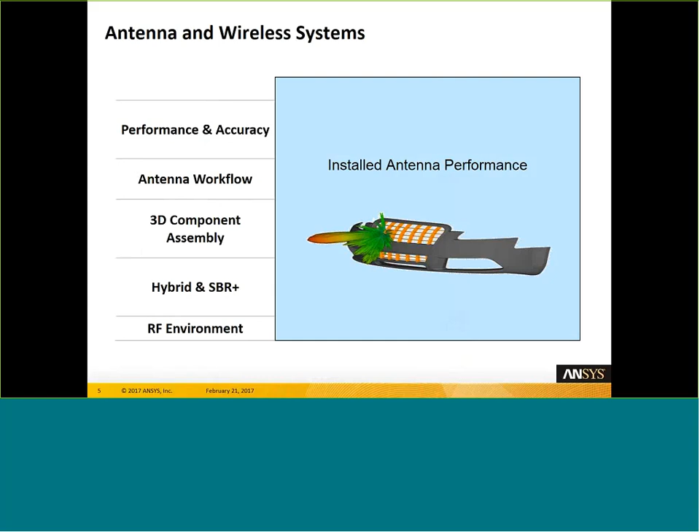Now, we'll start the presentation by talking about some of the enhancements and advancements in our solutions for antenna and wireless systems. And we'll be covering a range of topics regarding performance and accuracy improvements, improvements to design workflows and antennas, some interesting enhancements for 3D component assembly, hybrid and SBR+ solving, where we combine finite elements, integral equations, and shooting and bouncing ray solutions in one environment, as well as enhancements to our RF environment, namely enhancements to our EMIT product.

In detail, we'll be talking about topics like a new technology we call broadband adaptive meshing, some MPI enhancements to our frequency sweeps and overall enhancements to the speed, improvements to the antenna design kit, including the addition of some new antenna models. In detail, we'll talk about the 3D component browser, some topics regarding encrypted components, as well as data protection.

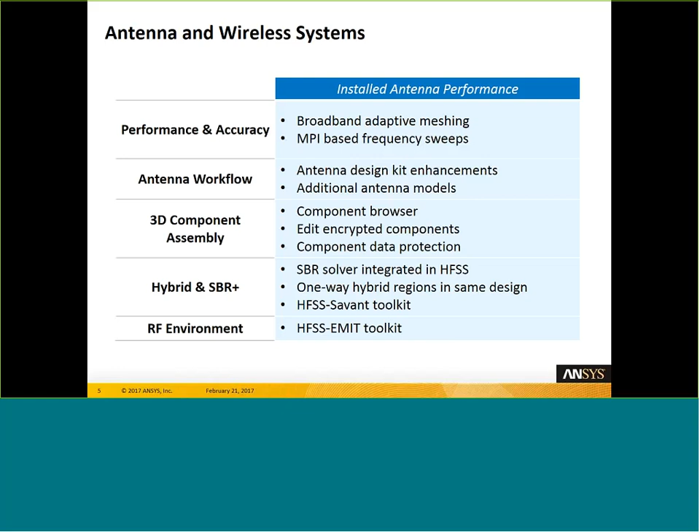The SBR solver is now integrated in the HFSS desktop. This is sort of our first step in integrating the technology from Delcross Technologies that came on board about 1.5 years ago. Some nice enhancements to our hybrid solving techniques, as well as our links between HFSS SBR+ and HFSS and EMIT.

Now, real quickly, we'll do a broad overview of the electromagnetic high-frequency solver portfolio at ANSYS. And it starts with, of course, HFSS and finite elements. So HFSS has been around for decades. It's been a staple solution for electromagnetic engineers for modeling, designing and simulating devices that range anywhere from passive components on ICs up to large antenna arrays.

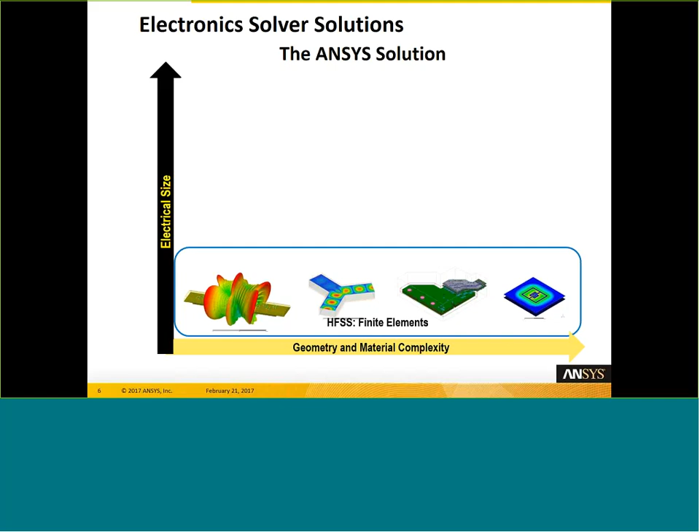Now, finite elements is a great solution when you get up to tens of wavelengths and you have a high degree of geometric complexity. But at some point, it starts to run out of gas as you get to very, very large electrical size. So we also have a 3D method of moments solution that is integrated with HFSS that we call HFSS IE. And one of the interesting technologies that come with that is our FE-BI technology, finite element boundary integral.

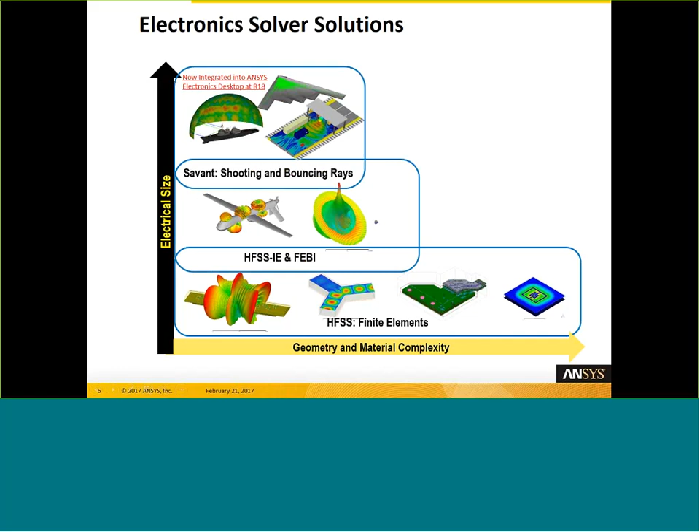And then, of course, new to R18 in the desktop is the beginning of the integration of the Delcross shooting and bouncing ray technology. And all of that technology is going to be pulled together and held together by our domain decomposition backplane solver, which is the heart and soul of DDM as well as our hybrid methods.

Now let's talk about SBR, or shooting and bouncing ray. What is this methodology? Well, it's an asymptotic technique that's complementary to HFSS. So, for example, in a flow where you're using HFSS and SBR, formerly known as the Savant product, you would use HFSS to model the antenna component, and then use the results from that antenna analysis to source an asymptotic technique to allow you to tackle really large antenna platform integration challenges in a very efficient and fast manner.

Now, it's an extension of physical optics techniques where it's extended with multiple bounces through geometric optic ray tracing techniques. It's very powerful. You start with a source point, like an antenna mounted on the top surface of this aircraft. You shoot out these shooting and bouncing rays. They paint new currents at various scattering points on the aircraft, and those additional currents are added to the overall results for the radiation pattern of the antenna.

And in a little more detail, our shooting and bouncing ray plus technology is an extension of the SBR technique where it adds correction factors such as physical theory of diffraction, uniform theory of diffraction, creeping wave technology, as well as curved surface divergence factors. So it's an extension of shooting and bouncing ray for a much more accurate, much more physical solution.

And again, you start with bouncing rays, you paint currents. Those currents can themselves shoot additional rays, which will create additional painted currents. We can take into account corrections for edge current PTD effects, as well as UTD edge diffraction, and take into account creeping waves where you have ground currents creeping around over surfaces that the antenna is mounted upon.

That all ends up with the image in the lower right-hand corner where you have not only the original source antenna contributing to the far field patterns, but also this large number of painted surface currents on the scattering object, allowing you to understand exactly how the antenna is going to perform on the platform. So it extends our accuracy from the antenna level all the way up to the platform level.

And of course, it's very, very efficient as an asymptotic technique. And as you can imagine from a quick description of the shooting and bouncing ray approach, it's very parallelizable. So you can solve very, very large, complex problems in a very short period of time, with modest amounts of memory, and solve very large electrical size models.

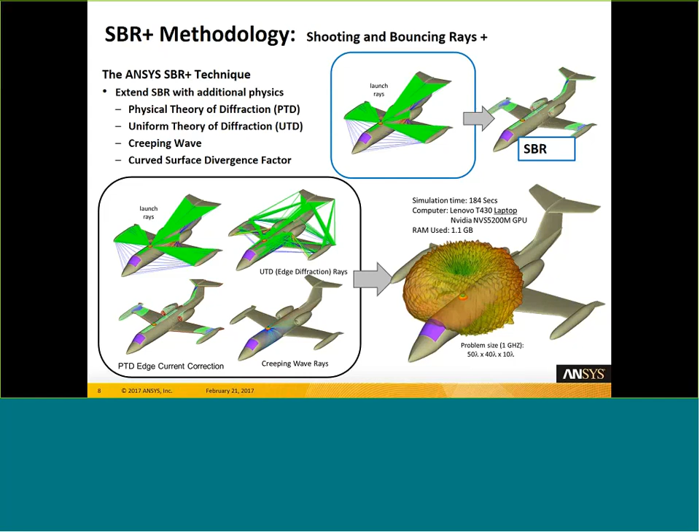Now we're still maintaining the legacy Savant interface. That will be going on for a few more years. So there were additional enhancements in the R18 version of Savant standalone, most notably N-by-N coupling mode, which allows you to, in one simulation, simultaneously generate far-field patterns as well as S-parameter coupling terms between multiple platform-mounted antennas.

Overall, the multicore scaling has been improved, including enhancements with GPU performance for rendering, for example, of imported near-field antenna sources. And some of the user defaults have been improved. We found that over the years, everybody was setting defaults a certain way to most notably guarantee higher accuracy, so we've adjusted the default. So out of the box, it has a more user-friendly behavior.

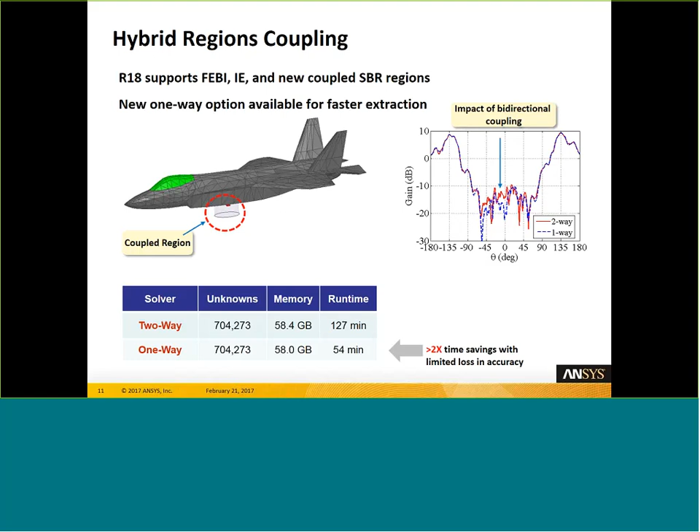We've also enhanced our antenna design toolkit, which is a feature that's been available with HFSS for a few releases now. The antenna design toolkit is an ACT extension inside the HFSS platform that allows a user to synthesize some basic antenna topologies and models to, for example, start their antenna analysis job. We've enhanced some of the usability for the flow, made some of the flow a little bit simpler, a one-click completion step. An easier to use tree structure to browse through and pick your antenna topology of interest.

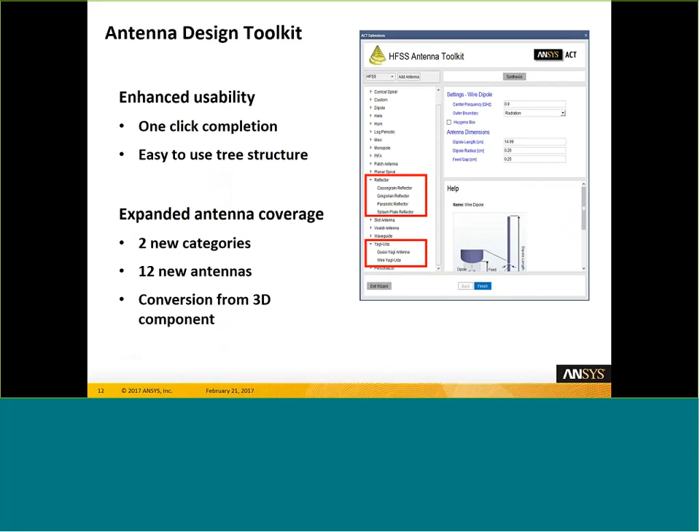We also added some new topologies like reflector antenna and Yagi-Uda antenna topologies. And probably most notably, we've added a custom antenna topology where if you have an antenna design that you've saved as a 3D component, you can now incorporate that antenna design in the antenna design toolkit. So if you want to reuse one of those designs again and again, or maybe you want to share that with some of your colleagues, you can integrate it right into the antenna design toolkit.

So the steps are to find your 3D component, go to the add antenna category, browse to your 3D component file, typically in your installation directory, select your antenna, and park that right there in the installation for use later on.

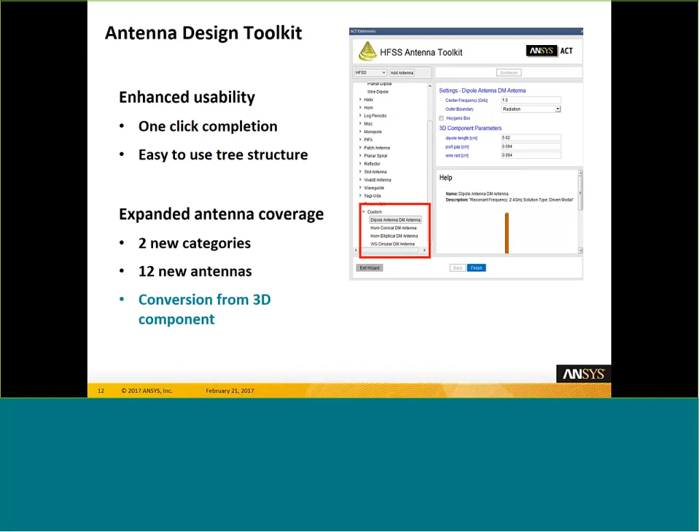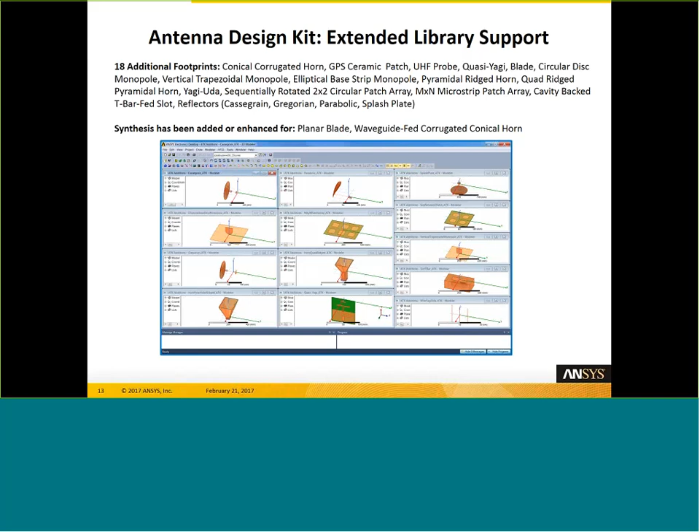And as mentioned, the antenna design kit, the overall support for the library is extended with 18 additional footprints from what we were working with in release 17. And this is really just to extend the coverage of all the different antenna topologies that are out there and people are interested in using and starting out their design flow with HFSS.

Now our EMIT product is another product along with Savant that came from Delcross Technologies, and we've extended our capabilities and our coupling between our desktop technologies and EMIT with a Nexxim EMIT data link. Now what this data link is, it's an automatic creation of an EMIT compatible transmit model, behavioral model from a detailed Nexxim circuit design.

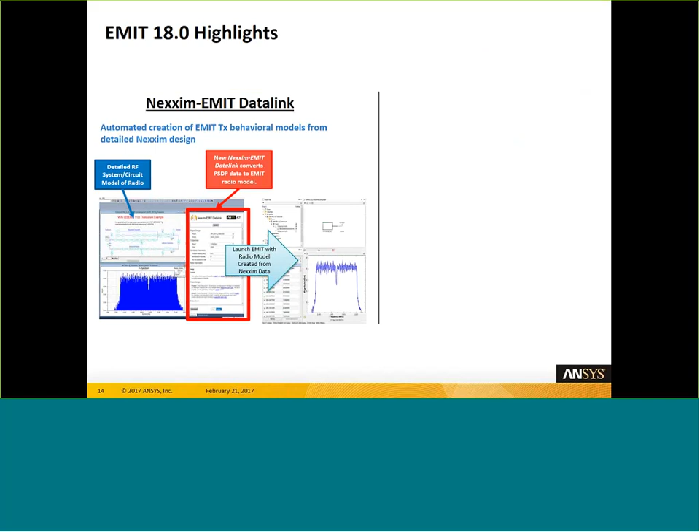So you can have a detailed model of your radio system in Nexxim, laid out, simulated, results generated, and a single click gets you to an export window, which allows you to pass that radio model information directly over into EMIT. It's very quick, easy to do. You have that model, that radio model, ready to run in EMIT.

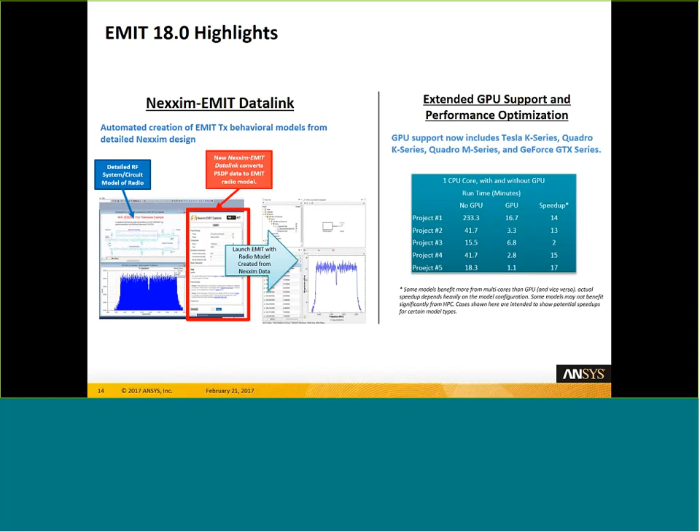In addition to the Nexxim EMIT data link enhancement, we've also extended GPU support for EMIT, which is, again, a highly scalable technology that can be parallelized. Some nice improvements and speedups overall with GPU technologies and enhancements across a range of projects, 5 projects that have been tested here.

Some other enhancements to EMIT in 18.0 is new radar modulation schemes are now available, including FM, non-FM, CW, a range of radar modulation schemes can now be added. In addition, you can create custom fixed coupling schemes in EMIT, where you, as a user, can define in what frequency bands you want to tolerate certain levels of coupling or detect certain levels of coupling between multiple antennas operating in different bands.

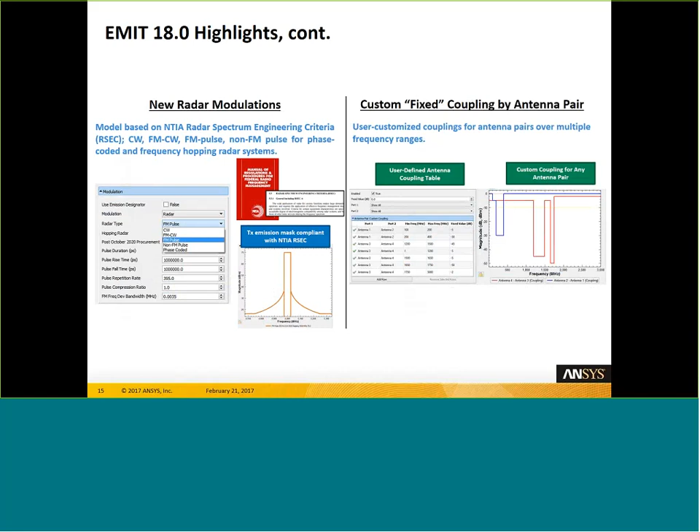Now let's move on to our next topic, about meshing. Meshing is a very key part of HFSS, and oftentimes when we talk to customers they're very interested in hearing what we can do to enhance meshing, most notably speed. So in R18, the meshing technology has been improved in the refinement step of the meshing scheme. And these are steps associated with refinement, the adaptive mesh from pass to pass, if you have any seed operations in your mesh definition, or if you're utilizing curvilinear elements.

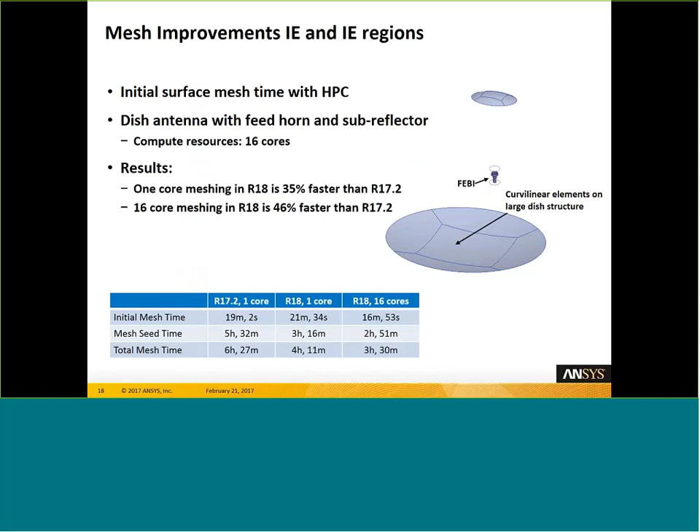Now, that meshing topic brings us to what I think is one of the most impressive new technologies that our developers have implemented in HFSS for a number of releases now, and this is broadband adaptive meshing. Now, first let's talk about adaptive meshing in general. That's the cornerstone technology of HFSS, and it's what makes HFSS so powerful and so valuable to our customers, because we let the physics, the geometry define the mesh. We don't ask the user to define the mesh and determine how to get the right answer.

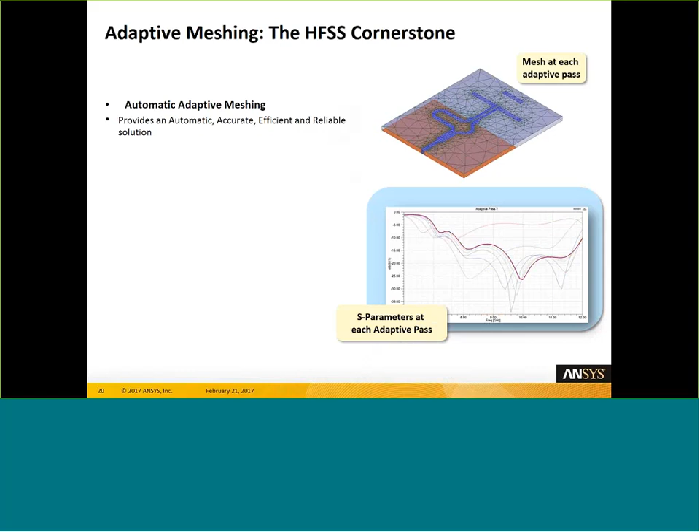The ability to automatically adapt for an accurate mesh that's efficient as well as reliable. This is why people rely on HFSS for accurate solutions. It adds mesh elements in areas where dense mesh is needed to accurately compute the EM fields. And as mentioned, it's a key technology that ensures the automatic accurate electromagnetic simulation. And we've been using it from day one in HFSS.

And we're using a single frequency approach to adaptive meshing. You start with an initial mesh, you solve the fields at that solution frequency, you check the performance of the device at that point in time, you capture S parameters or maybe some far field quantities, you do a mesh refinement, solve it again at that frequency, and you check how those parameters have changed from pass to pass, and you set a convergence criteria where you say, okay, I've done my adaptive mesh, is it converged, now move on to this frequency sweep.

For broadband accuracy, though, the choice of the mesh frequency can really impact the accuracy of the results. You can mesh at a single frequency representing a typical response of the device, and many of our customers have used that technology for years for accurate solutions, but not always reliable. In some designs, and I'll show you an example in a few minutes, you really do need to mesh at multiple frequencies.

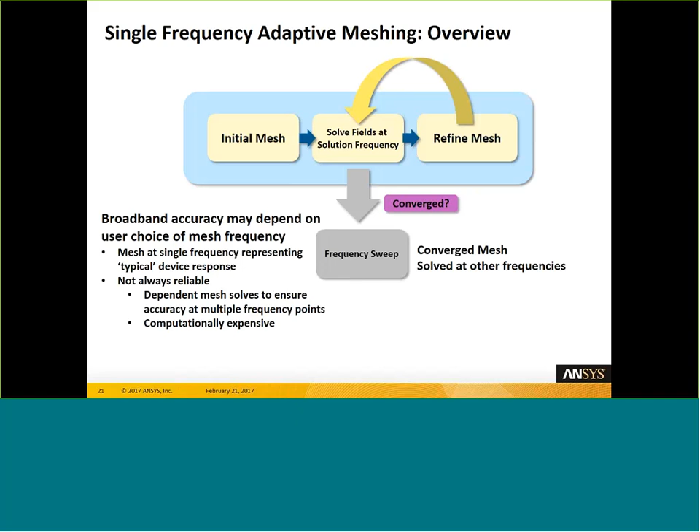And we've had multi-mesh capability for many years, decades even, where you can basically mesh at one frequency and pass that mesh to another frequency and do adaptive meshing from there. But that approach could be computationally expensive. And then the question was always coming up, so where should I set my meshing frequency? And it could depend on the application, whether you're doing antennas or you're doing an IC package extraction, but it's a very common question from our customers.

Should I use the midpoint of the frequency band? Should we use the highest frequency of the frequency band? What about square root 2/2 of the highest frequency? I actually know customers actually use this rule. But hey, what about if we could use all of the above? And that's what broadband adaptive meshing is going to bring to the table in HFSS R18.

In broadband adaptive meshing, we're going to still start out with that same concept, but we're going to take that initial mesh and we're going to solve it at multiple frequencies and use information from all those frequencies to adapt that one mesh, and then do that similar refinement process where we keep track, at all these different frequencies, of S parameters or far field quantities or field quantities, just as we've done with a single frequency, but we're using information across the entire frequency band to adapt the mesh.

And what's really powerful about that is it really removes a lot of the uncertainty about what frequency should I use for my adaptive mesh. You can now use all the many frequencies across the band that you're interested in. So multiple points can get solved. They can be solved in parallel by leveraging HPC and multiple cores or multiple compute nodes.

An interesting little feature of this approach is if you solve multiple frequencies in parallel, they can pre-seed your frequency sweep. So you get a little bit of a kickstart to your frequency sweep analysis. So overall, we see faster frequency sweeps using this broadband adaptive meshing. But the real key to broadband adaptive meshing is removing that uncertainty question about where should I set my adaptive mesh. Set it across your frequency band, take advantage of HPC hardware, and really remove that uncertainty of where you should do adaptive meshing.

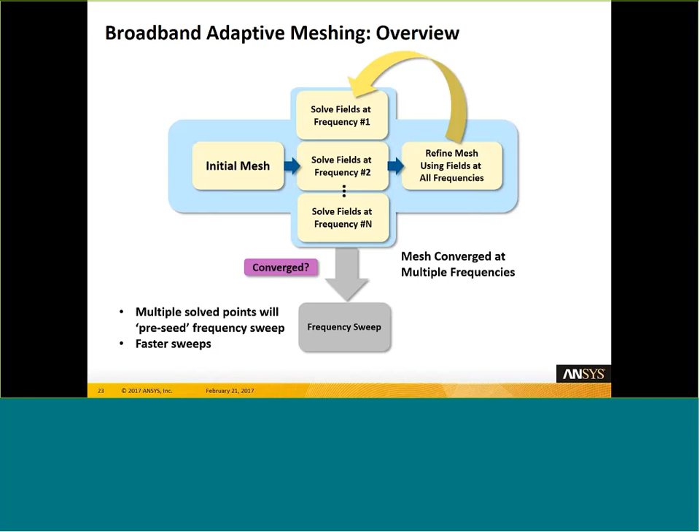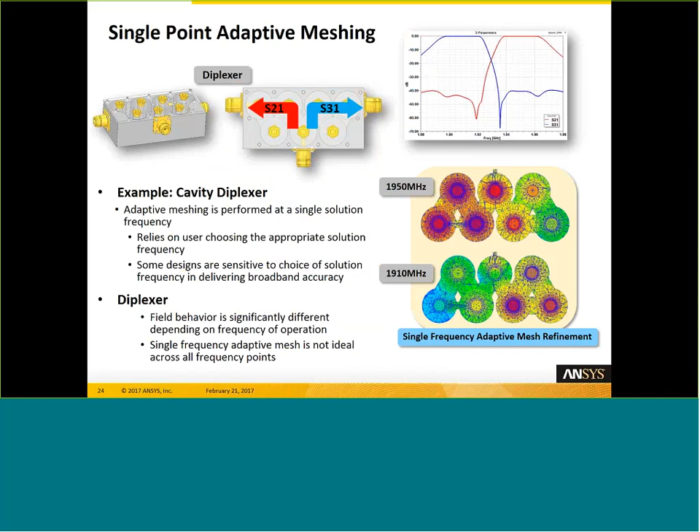It relies on the user to choose the right solution frequency. Definitely for diplexer design, and for filter designs, typically users will do multi-frequency adapt, where they'll mesh at one frequency and pass it to another frequency to do additional meshing. But the important thing is your field behavior is very dependent on the frequency. So having a mesh that's generated from multiple frequencies is key.

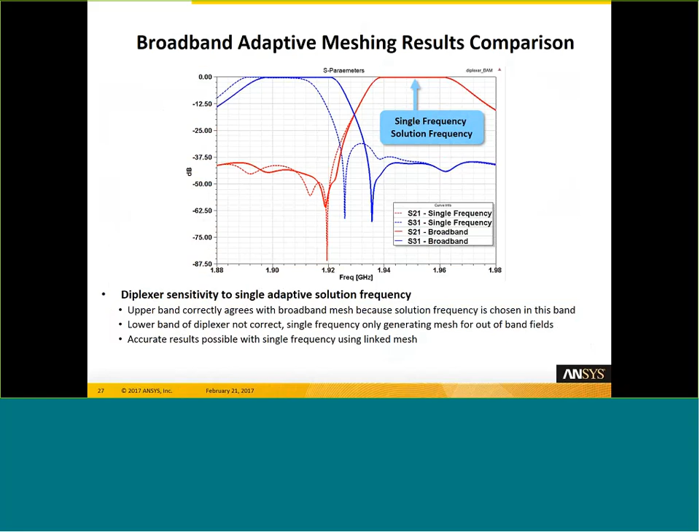Accurate results are possible with a single frequency, but we'd have to use that linked mesh technology that we mentioned earlier. But now that's gone. In R18, we can mesh them both in parallel. So the setup in HFSS is going to look pretty similar to what you're familiar with today. We haven't left the single frequency approach behind. No one is going to make you do this. If you want to keep doing single frequency, you go right ahead. But there's a couple of new options in R18.

There's a broadband definition where, as the user, you just define the low and high frequency of interest in your analysis, and HFSS will automatically pick appropriate frequencies for doing the adaptive mesh. Which frequencies it picks will depend on a couple of things. It'll depend on how broad the band is, whether it goes from DC to high frequency. It'll depend on how many machines or cores you make available to the analysis. If you make more cores available and there's enough memory available, more frequency points will be solved in parallel. And I have an example later on to show you that. But it's using essentially a selection criteria that's analogous to our interpolating sweep scheme for generating broadband S-parameter results.

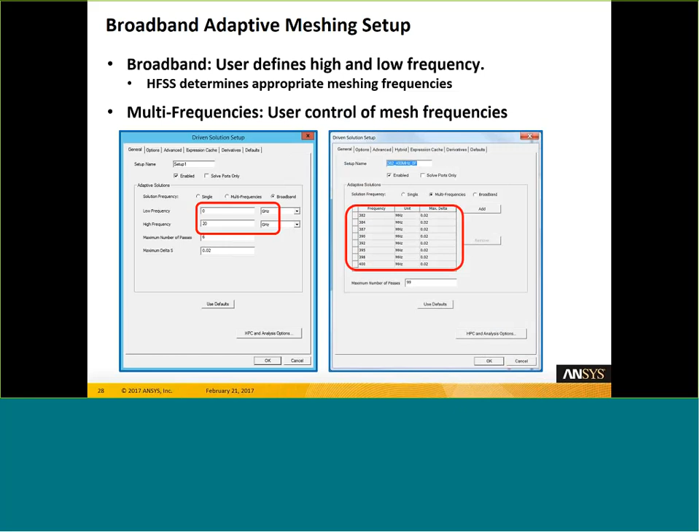But broadband is really the approach where, as the user, we're not going to ask you to think about where to set the meshing frequency. We're going to determine it automatically for you. But if you're an expert user and you want to have that control, that's available to you as well with our multi-frequency setup, where as an expert user, you can select any number of frequencies where you want to do your adaptive mesh. You can have unique convergence criteria for multiple frequencies. You can set very, very specific frequencies. Again, you sort of have the best of both worlds: the approach where HFSS automatically determines the correct frequency, and the approach where, as a user, you can set them manually by yourself.

So in the area of solver improvements, which again, like meshing, is always being asked about by our users, how can we solve faster? A number of nice new technologies have been added in R18, and the most significant one you're going to see, especially if you're using interpolating sweeps in your design flow, is an S-parameter only matrix solve. And this is really kind of an interesting approach to solving a frequency sweep.

When you're doing an interpolating sweep in HFSS, you have your mesh created with the adaptive mesh process. During that process, the fields get saved, and that's an important part of the adaptive meshing routine because those field quantities give you the information that directs how you adapt the mesh. But once you get to the frequency sweep, especially an interpolating sweep where you no longer need the fields, there's no need to spend any effort extracting that information.

With this S-parameter only approach, what's being held in memory is only the part of the matrix solution needed for extracting just the S parameters. Overall, that results in a faster extraction, modestly faster by 10 to 20%, depending on the size of the model for each frequency point. But most importantly, there's a much lower memory requirement to this approach.

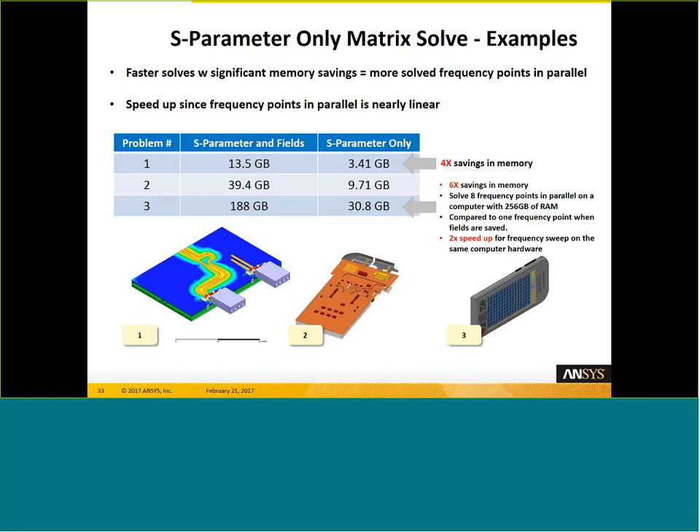Other improvements to the solver technology in HFSS: when you look at the profile of HFSS, there are different steps, and for years we've really focused on the solver line where we're actually extracting the matrix. But other parts of the solution process can begin to dominate as we see users doing very complex designs in HFSS. One of those processes was matrix assembly, which has been sped up through a combination of algorithmic improvements and implementation of HPC across multiple cores.

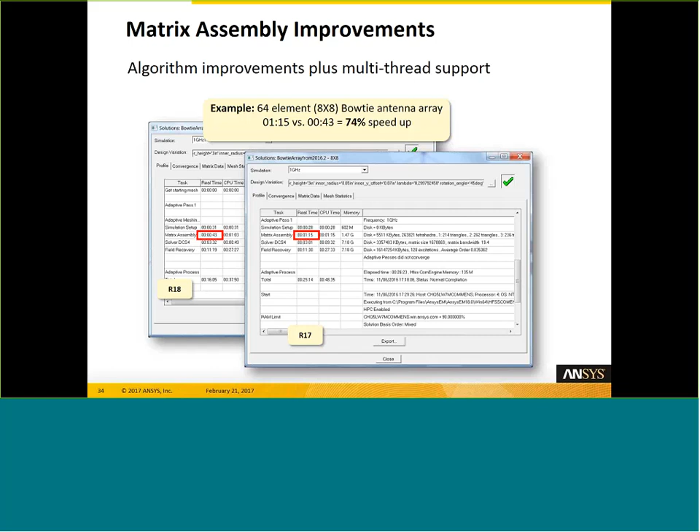So let's put this all together with a little bit more complex model. It's a model we've been working with over the last few releases to demonstrate how things are solving faster in HFSS. It's a package on PCB model. Here we're analyzing 2 differential pairs, so 8 terminals overall.

We're going to do a frequency sweep from DC to 20 gigahertz. Hardware we're using is 14-core Intel Xeon processors, 2 gigahertz, 2 processors per node, 2 nodes overall, so a total of 56 cores for this analysis. We're taking advantage of our auto HPC technology, which, as a user, you just say here are the cores you can solve on, and we'll automatically figure out how to take the best advantage of them.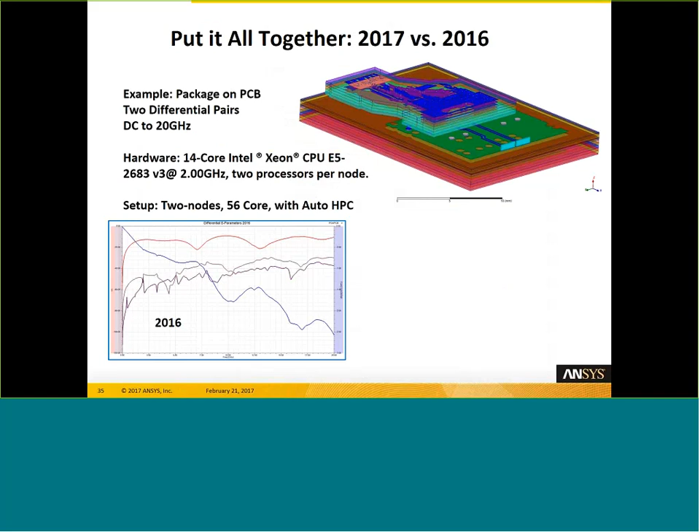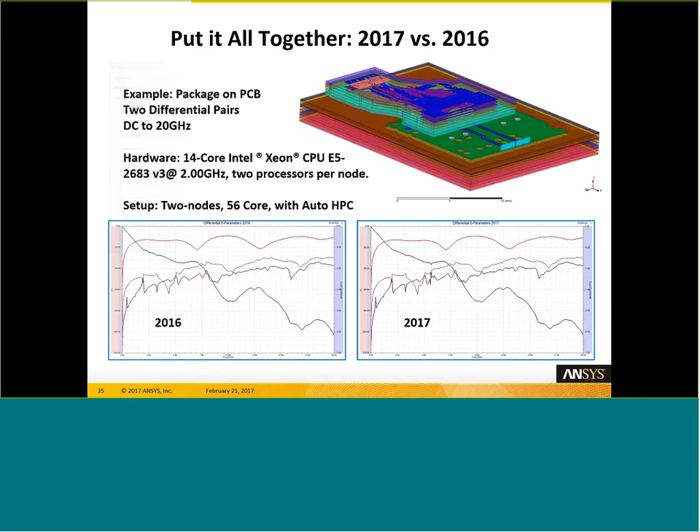So how do the results compare when I do 2016 versus 2017, or R17 versus R18? Very comparable results, almost spot on, very difficult to see any differences. What about solution time? Elapsed time in 16 is 224 versus 149, so it's an hour 49 in 2017.

This is the frequency sweep, so the previous times were the meshing times, the adaptive meshing times. The frequency sweeps here have been improved considerably, and this is really a big payoff from the S-parameter only solution, where the memory has gone down. We can pack more frequency points in parallel. We see a huge speed up overall, greater than a factor of 2 speed up for the frequency sweep.

Looking at these in more detail, in our previous release, release 17, total simulation time was 11 hours. Release 18, total simulation time is just under 6 hours, or almost 89% faster overall. But look at that speed up for the frequency sweep, 114% faster in release 18. That's a big payoff for that S-parameter only matrix solve.

Now let's add in one more variable that's been introduced in R18: broadband adaptive meshing. The previous example, we were just doing the traditional single frequency point adapt and doing the frequency sweep. Now we're going to run that same model in R18, and do the broadband mesh from DC to 20 gigahertz.

What do we do here? We use auto HPC again. We say here are 56 cores, and we had quite a bit of memory on the machines, hundreds of gigabytes. With all the memory available, the analysis is able to solve 28 frequency points in parallel during the adaptive mesh routine. So adapting all 28 points in parallel, adaptive mesh took a little bit longer than the single frequency adapt, kind of to be expected, because we're using fewer cores per frequency point.

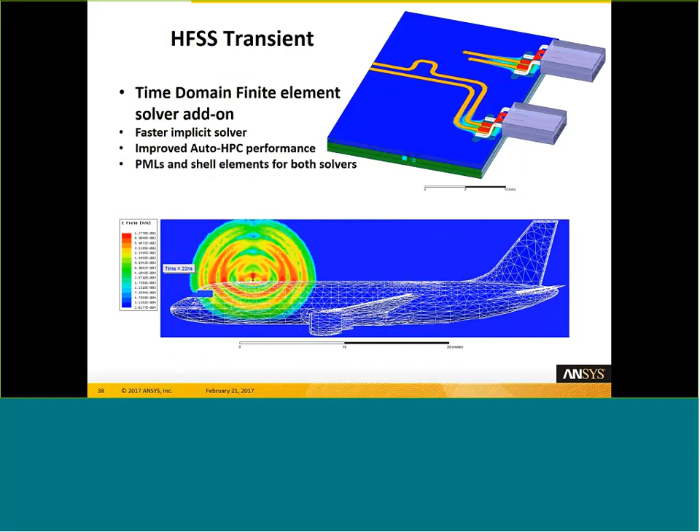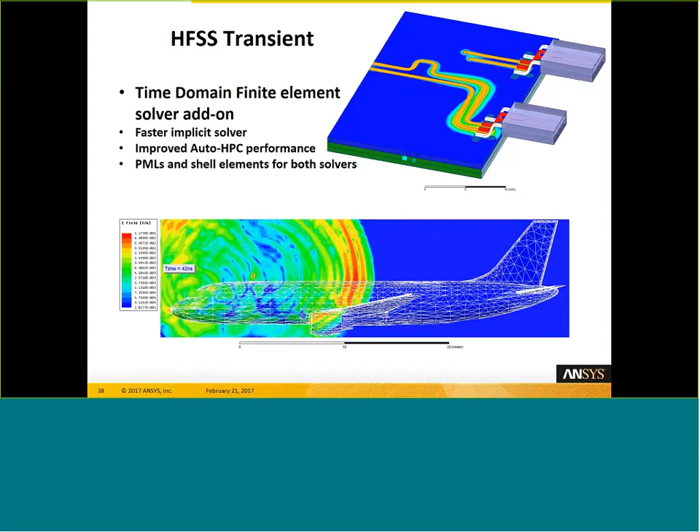Where do we see users extracting with our time domain solution? When they want to look at time domain answers, like these fields propagating in time, or if you wanted to look at, for example, TDR in a device. With the time domain solver in HFSS, which uses the same meshing technology as HFSS frequency domain, you can extract the time domain information along with the frequency domain information that you do with HFSS.

Now, also in R18, we've made a big addition to the base product of HFSS. And to talk about this addition, I'm going to go back in time just a little bit, a few years.

Back to HFSS 12.1, probably around 2010, maybe 2011, where we introduced our new IE solver. What was IE? It stood for integral equation, a 3D method of moment solver technology you could add on to an HFSS seat.

A very, very efficient solution for large open radiating problems like antenna on platform or RCS analysis. Just like HFSS, adaptive meshing was built into the technique to ensure accuracy. We have multiple fast solver technologies, both ACA and MLFMM. Easy to use interface, because if you knew HFSS, you know this interface - it's all there, same interface. It could even utilize results from HFSS to be a source in a coupled model approach.

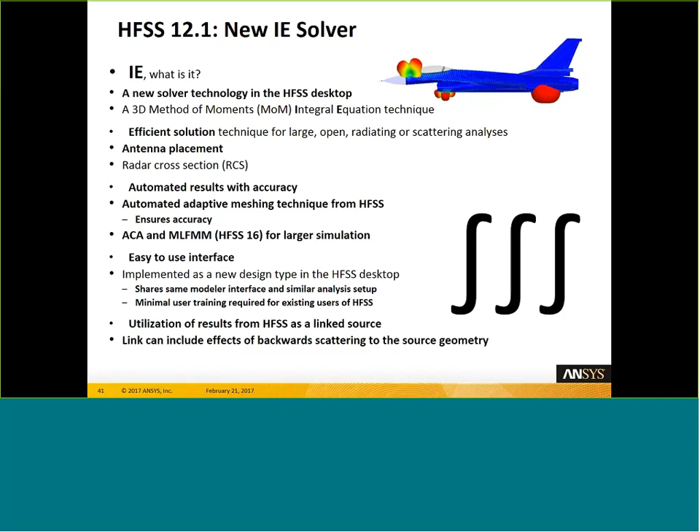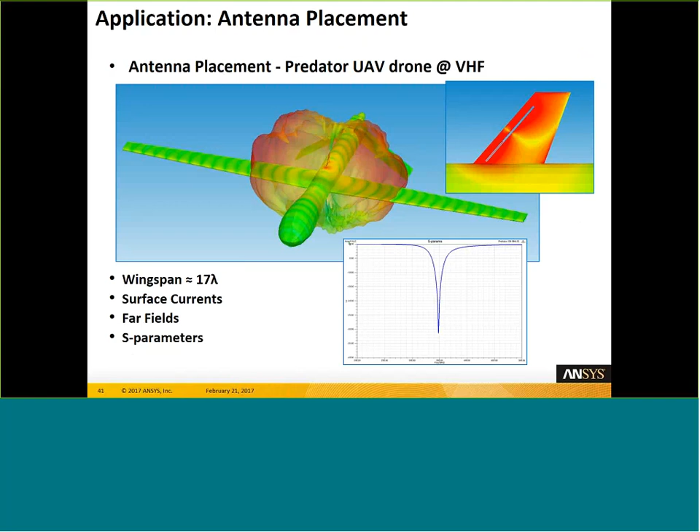And where was it addressing? Electrically large problems, which nowadays this isn't so large, but back then this was a big problem. We were analyzing a VHF antenna on a UAV drone, almost 17 lambdas in size. Using IE, you could solve it in a very reasonable period of time with a very reasonable amount of memory. Again, adaptive meshing was built into that technology.

This is an interesting analysis of that blade antenna, where we're looking at the response from both the finite element solver of HFSS and the IE solver converging to the same answer using adaptive meshing. So again, we're using all that great technology that you're familiar with over the years and applying it to 3D method of moments.

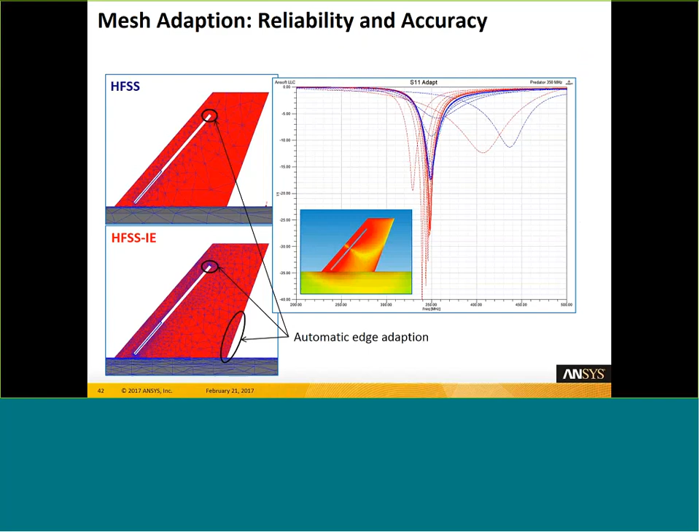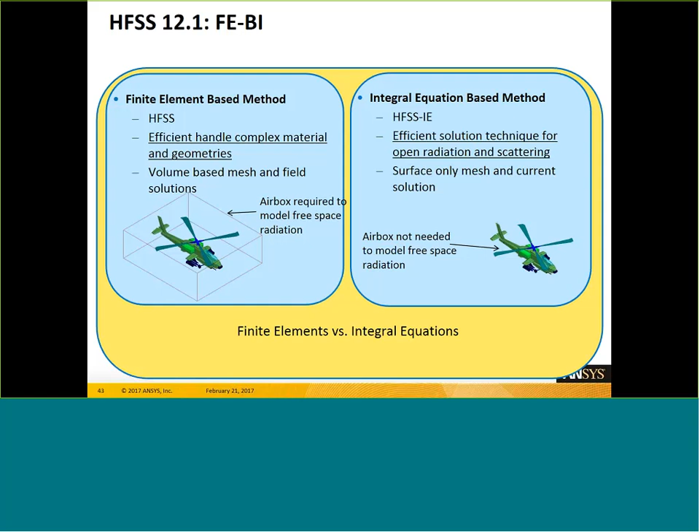Another big one that came in this release was FE-BI, finite element boundary integral, where you could truncate your finite element solution with an integral equation version. Hyper accurate solution to the free space radiation condition. Utilize the surface only mesh on the outside surface of the airbox to solve for the equivalent surfaces for the free space radiation condition. You combine finite elements, the ability to handle complex material and geometry, and integral equation or method of moments for large open problems.

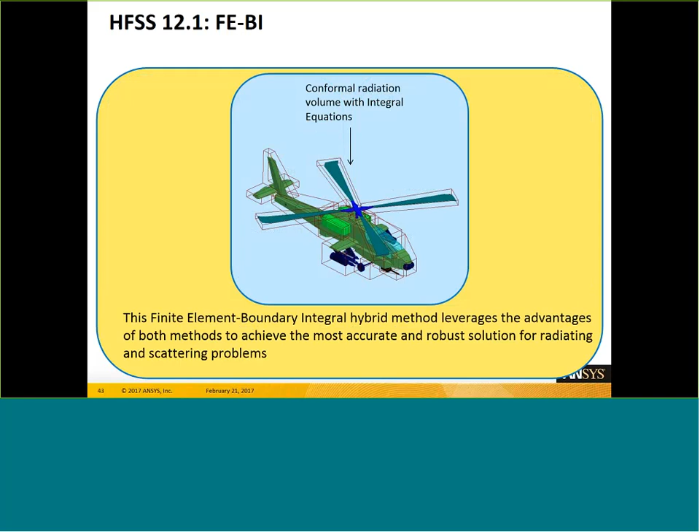And you have this terrific technique, FEBI, where you can use a hyperconformal air volume to shrink your finite element solution and still have a very, very accurate solution to the far field pattern. So it was using the best of both worlds in finite elements and boundary integral.

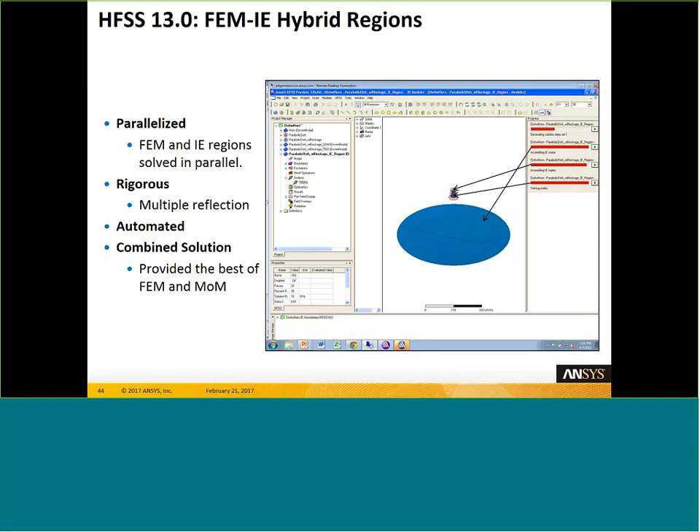This technique was then extended in HFSS 13 with a more general hybrid technology. We're using finite element and IE, but instead of being restricted to the FEBI boundary, you could also add a 3D method of moments object in that same domain with finite elements and solve a fully accurate, fully coupled matrix solution automatically in one desktop at HFSS 13.

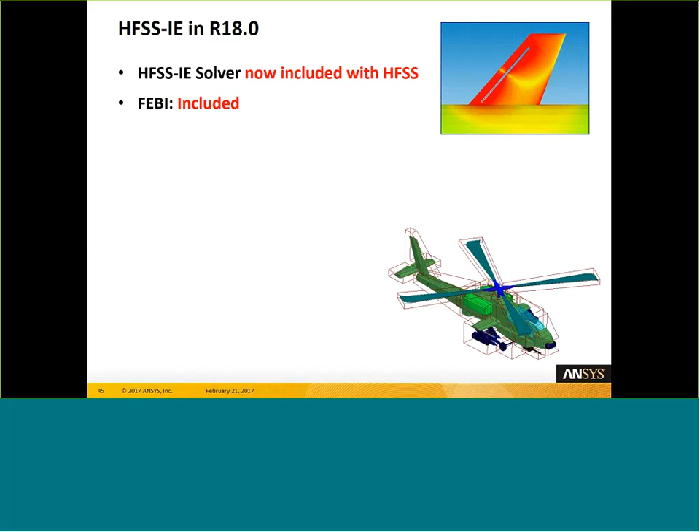And now in our R18 of HFSS, IE is now included. So if you have R18, you now have available to you the HFSS IE solver. FEBI is now included in HFSS. Hybrid finite element IE solver is now included in HFSS. So what we're doing here with HFSS in R18 is in one product you have both full wave finite element and method of moment solutions in one product. And it really extends and delivers a single solution for a complete antenna synthesis design and integration platform at R18.

So remember, we talked about the antenna design kit earlier. You start with that kit to synthesize your antenna, solve it with finite elements, and do a platform integration analysis with IE, all in one platform, HFSS.

So moving on to more of a usability area topic, let's talk about some of the improvements to our 3D modeler. I actually, as a long time user of HFSS, find these improvements - there's no other word for it - some of my favorite. I love these little usability things. And the first one is a really nice feature that I've been leveraging quite a bit: tree grouping and hierarchy in the model tree.

Now in the model tree, if you've got a bunch of parts, instead of flattened out and organized according to materials, you can add a set of hierarchical levels to organize your designs. And this is really just an organization thing. It has nothing to do with the actual geometry and how you create it or anything like that.

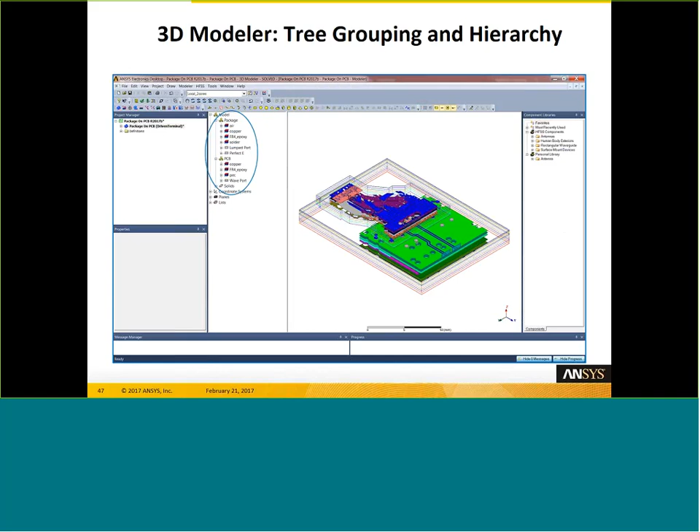You can do everything you're doing today, no change to your flow, but this hierarchy, this tree grouping allows you to package parts of your design into very specific categories in your tree. It just helps you organize your design flow overall. It's a really nice enhancement. I use it all the time. You can have multiple levels to the hierarchy.

You can have any range of objects included in this hierarchical group, including 3D components; UDMs can all be in the history tree. You can have unlimited nesting. You can do group actions on these hierarchies like copy, paste, or delete. You can move objects from group to group freely. It's very flexible. It's a really great way to organize your design and create some sanity over what we see people doing today with some very complex and difficult designs.

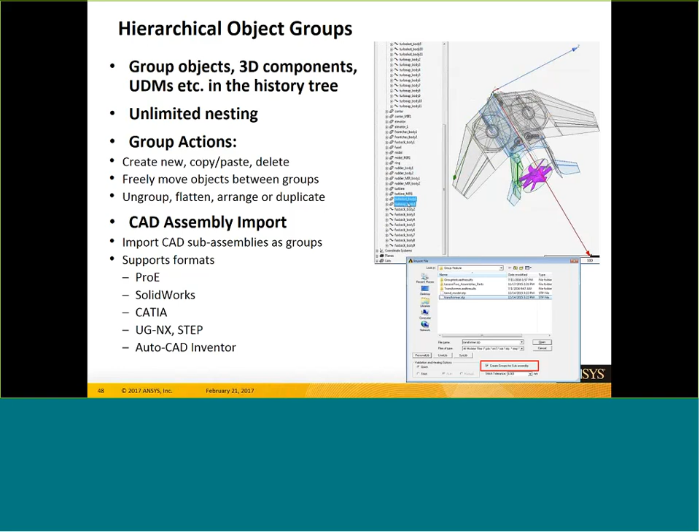It supports CAD assembly on import, which have assembly definitions in them, so that assembly can be captured and saved, which is very nice for the supported formats like Pro-E and SolidWorks.

On the 3D component improvement area, 3D components is a technology we've been rolling out over the last few releases, which is a way for you to capture parts of your design and reuse it, as well as, if you want to, encrypt 3D components to share your design with other users but not expose your design to them. There's a new component browser window where you can organize your 3D components on the right-hand side of the window, just to categorize them.

For example, we have a number of antenna topologies now included with the release. You can have your own personal library of 3D components. So very easy access to 3D component definitions. There's a drag and drop feature, which I'll show you in a second in the video, which is really nice. And 3D components and this browser window really make it easy for you to manage your favorites and easily access them during your design flow.

A new feature with respect to encrypted components: if you're sharing an encrypted component with password protections, there's now an edit password that you can add to the component definition. It's a unique secondary password that you can give to an end user to do their own editing of the encrypted component if you wanted to.

So overall, the power and the value of 3D components is it really provides a powerful collaboration workflow. With this drag and drop capability, with the ability to encrypt these components, allowing you to share them across the supply chain, it really allows our users to collaborate with one another and create powerful, efficient, effective, and accurate systems.

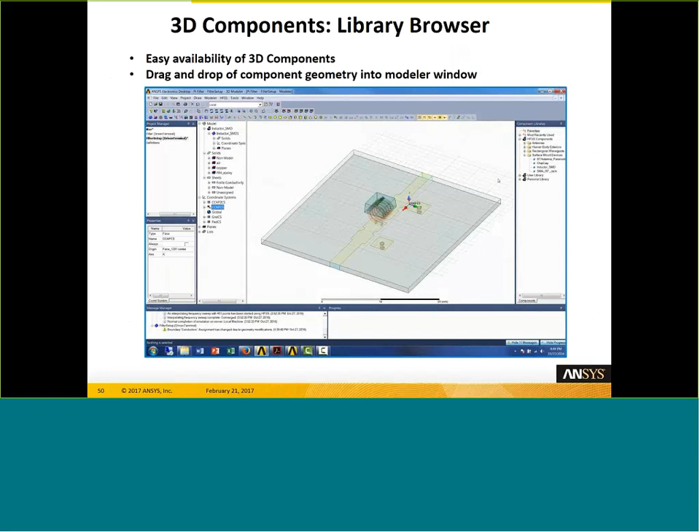I can go to a new coordinate system location, drag and drop in a capacitor definition, and then a third location to drag and drop in another capacitor definition. What's nice about this is a way you can reuse your designs. You can share these 3D component models with colleagues and vendors or customers. Let them use these components in their own design flow and very easily integrate them into their design. So that's a really nice feature.

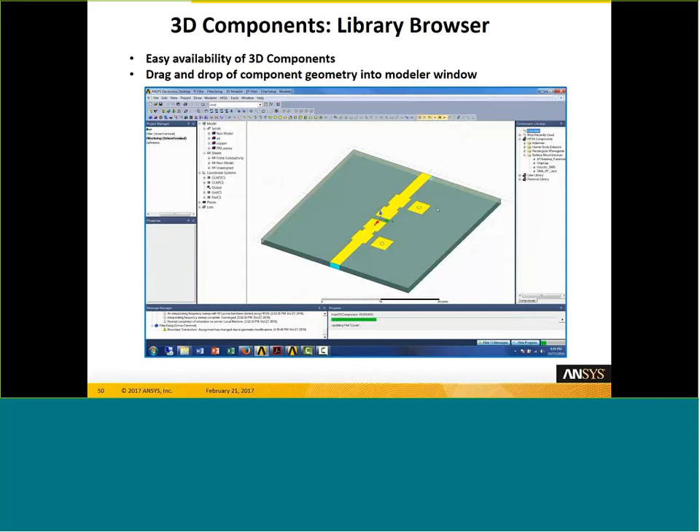This is one of my favorite features, along with the hierarchy in the 3D modeler of HFSS R18. Another interesting feature can help people who are dealing with more complex designs where they want to quickly remove some of the detailed features that aren't so important to the electromagnetics.

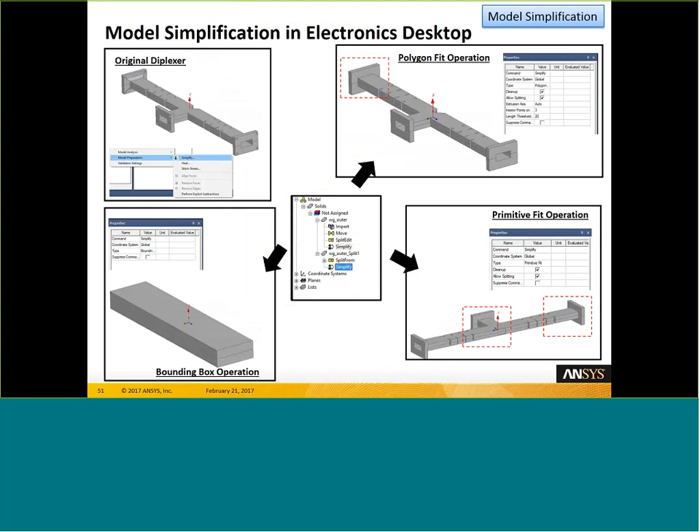There's a new model simplification feature in the Electronics Desktop 3D Modeler. It allows the user to really quickly grab parts of a design and remove fillets and chamfers or screw holes very quickly with one simple modeler step. This is a real savings in time to set up designs, particularly designs that you've imported from external CAD sources. There have been some nice improvements to the 3D far field patterns.

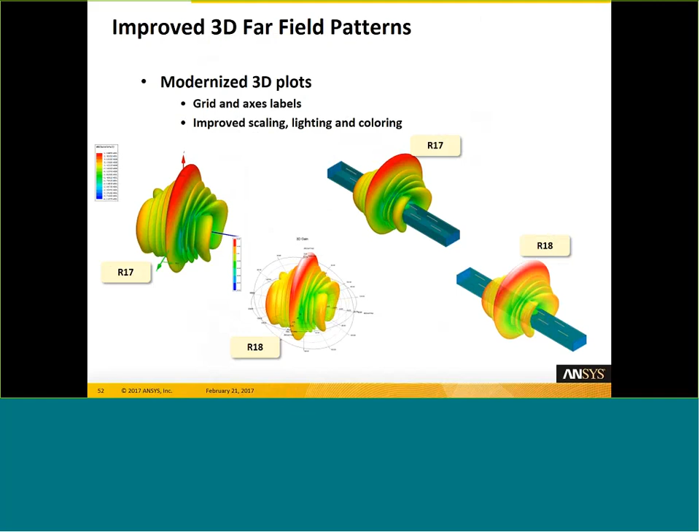This is the little stuff that I think release to release really makes your job easier, especially when you want to demonstrate the results of your simulation. A modernization of the 3D polar plots, so we've added grid and axis labels, improved some of the lighting in the modeler, just a little more improved visual effects overall.

Another favorite of mine in this release is an overlay. We've had overlay of far field patterns in the 3D modeler for a number of releases now. Now we've made it really, really easy to get to. If you have a 3D polar plot definition or 2D radiation pattern definition in your HFSS design, a simple right-click on the polar plot definition, and you go down to overlay visibility, and that quickly overlays the visibility of either a 3D polar plot or a 2D radiation pattern plot.

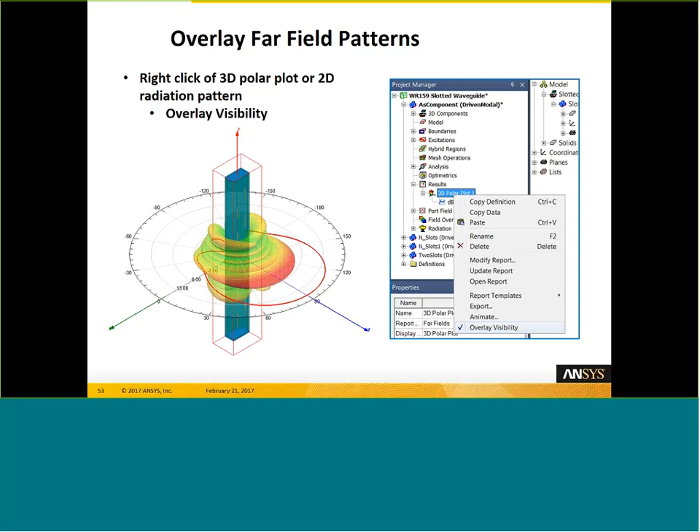That really helps you when you want to understand exactly how your radiation pattern is oriented with respect to your device, and of course, if you want to create a presentation to demonstrate how your device is working.

In HFSS 3D Layout, which is our alternative workflow, which comes with HFSS 3D, the layout-based workflow in HFSS, there's been some significant improvements over the last few releases to address an application that a number of customers ask about, which is to run simulations that combine designs that are drawn in layout, such as a tool like Mentor or Cadence, along with a 3D model.

For example, this example here, where we have a combined solution of a complex printed circuit board with a 3D connector model. Now, this was introduced in the last release, release 17. It gave you a way to link a 3D model of a component into a 3D layout model of a printed circuit board and bring those components in, orient them on the device, and do a full simulation.

Now in release 17, the way this full simulation would work is the PCB would be solved standalone. The two connectors would be solved standalone. They would have their S parameter responses automatically connected together correctly based on how they were defined and located on the pins and layout, and you could get a full system solution to this more complex combination of connector and printed circuit board.

As soon as we delivered this feature, the automatic request was, hey, we need a full 3D mesh of that design because we don't want to take the approximation of cascading S parameters at the interface between the connector and PCB. We want a full 3D mesh, and that is available today. Now in 3D layout, you can bring in a connector design, locate it on the board, and you can generate a full three-dimensional mesh of that design and run it and solve it fully coupled, taking into account all electromagnetic effects.

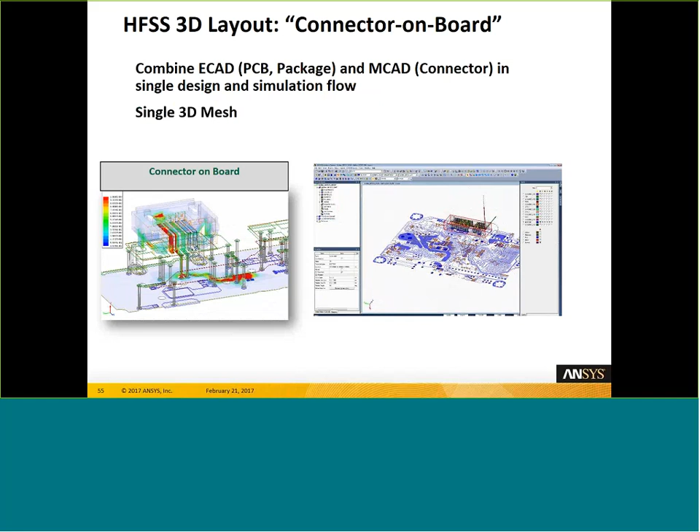In addition, some interesting system enhancements to 3D layout. As I mentioned, you can assemble ECAD and MCAD models together, like this example here with a DIMM card and a connector on a PCB. There's a new solver technology that's available in the desktop. You have to have the SIwave product to run it, but you can now run an SIwave simulation on a layout design in HFSS 3D Layout.

So SIwave is our fast PCB extraction solver, and you can see it's sort of a natural addition to the HFSS layout flow. So you can also connect up to this design in 3D Layout other information like the transmit and receive devices. You can have a schematic connection, look at IBIS and IBIS AMI modeling, QuickEye and VerifEye extraction.

You can do HSPICE simulation, although that does require the Synopsys HSPICE license to run HSPICE simulation. And you can now do PSPICE models in HFSS 3D layout using the Nexxim solver technology with the PSPICE syntax. So all this is available in a combination of our circuit simulation and HFSS 3D layout.

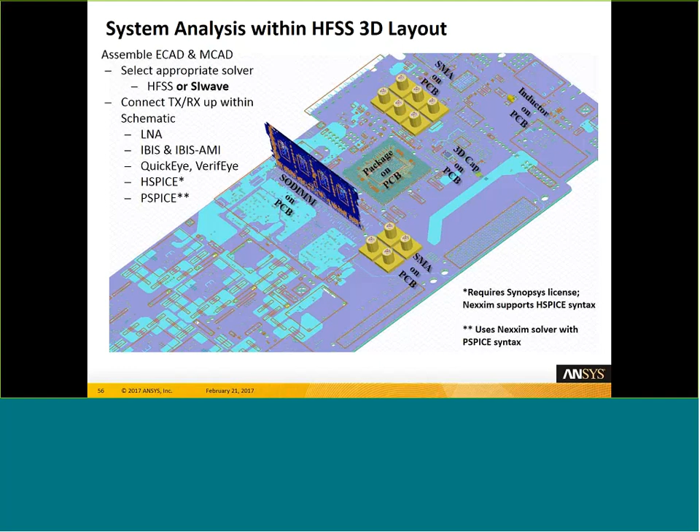Desktop and documentation, some nice improvements there. This one is really an interesting enhancement, and it's a resource optimization based on where you are in a simulation, really associated with frequency sweep jobs.

Now, if you really think about how an HFSS simulation is broken up, it's really broken up into 3 steps. There's the initial mesh generation, there's the adaptive mesh generation, and then there's a frequency sweep. And really, when you look closely at all the different parts of the HFSS solution process, they all sort of need their own unique amount of hardware resources.

For example, the starting mesh, all you need is the hardware on a single machine. Now with this 3-step option, you can define a unique set of HPC resources for that part of the simulation process. Now, when you move to adaptive meshing, you can add more machines, more cores to that part of the solution process, and apply the HPC resources then. And this is all automatically handled in the integrated schedulers in the Electronics Desktop.

So the key here is you're not unnecessarily reserving and holding resources for the adaptive mesh, or more so the frequency sweep, when you're, for example, creating that starting mesh. So you can define a unique set, a unique size. You can size your HPC resources appropriately for the different parts of the HFSS solution process. Really nice way to really optimize how you leverage your HPC hardware.

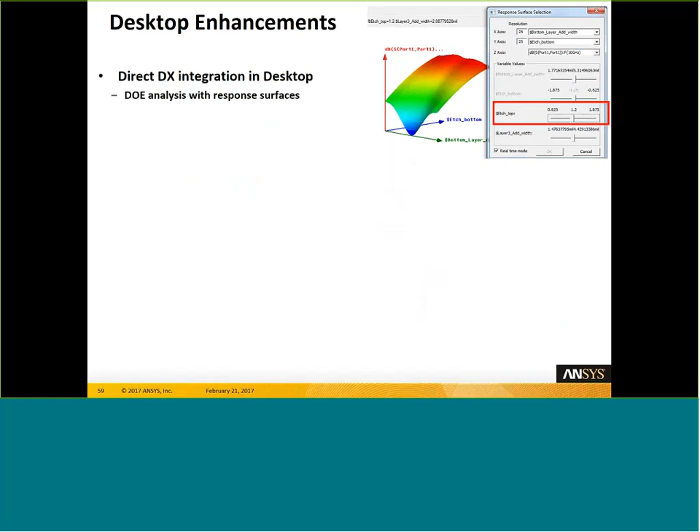So enhancements to desktop: we have direct integration of the ANSYS DesignXplorer tool right in desktop. DesignXplorer, or DX, is a tool which allows you to do design of experiment analysis, extract information like a response surface of your device with respect to a variety of parameters, such as an etching or a bottom layer thickness on a PCB.

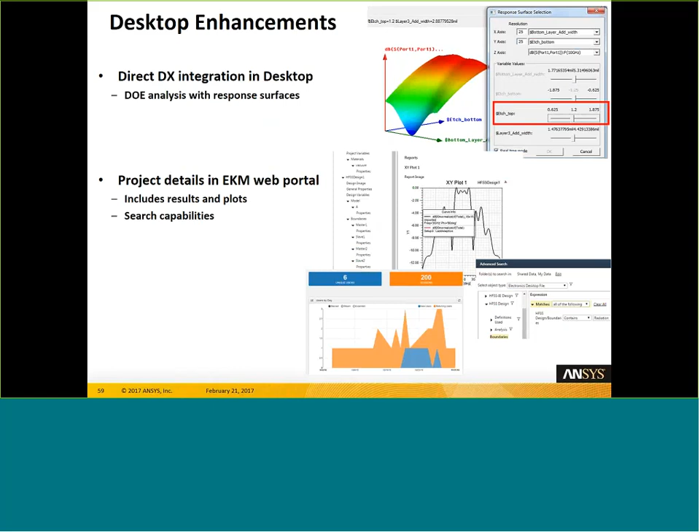We've improved our EKM web portal. It allows you now to look at results and plots from an EKM submitted HFSS job. That's been a common request from users leveraging EKM, as well as an ability to quickly search through your projects and simulations, even look at some statistics of your simulations.

The help has been enhanced considerably. We've extended it to a browser-based help system, improved some of the search filters. You can search across multiple products now. We've still kept the same F1 context-sensitive help, but it now brings up the browser interface. And a nice feature of this is it'll now be a foundation to deliver videos and tutorials and white papers in real time to our customers, as well as updates. Just be aware we also still include a PDF of our help if you don't want to use browser-based help with HFSS.

So quick summary before we go to our Q&A session. Looks like we got time for that. So in ANSYS HFSS 18, we've extended our capabilities with the addition of the shooting and bouncing ray solver to the desktop that really allows you to solve some very, very large-scale electromagnetic simulations very efficiently. Accurate broadband adaptive meshing is, I think, one of the best new features to come into HFSS, probably since domain decomposition method in version 12. I think this is really going to help a lot of our users really take advantage of the power of HFSS.

Speed: our S-parameter only frequency sweeps. I think everybody who's using interpolating sweeps is going to see a nice speed up overall in the extraction of frequency sweeps. This is going to be a big hit. There's no question in my mind.